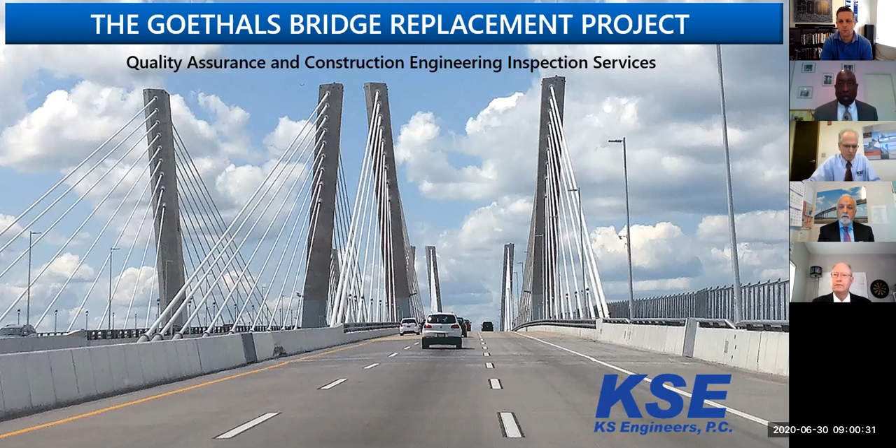to be able to present to you the Goethals Bridge Replacement Project from a quality assurance and construction engineering point of view.

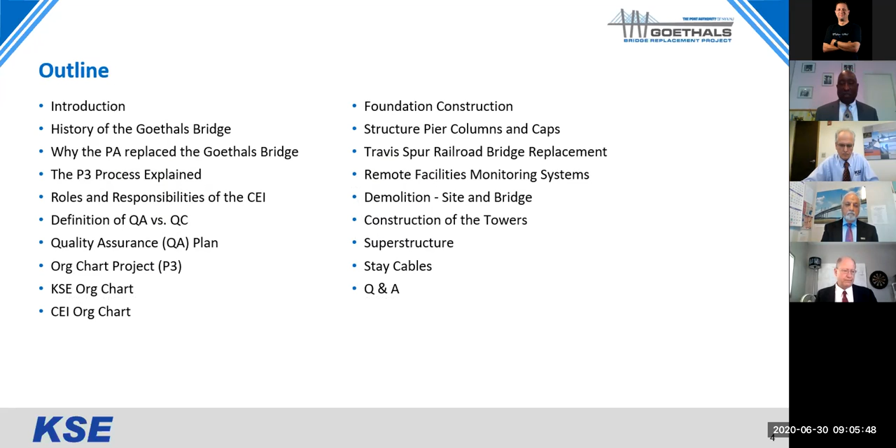Then we go into what we consider the meat of the presentation, the details, the challenges, the things that we had to face in order to make this a successful construction project, including the foundation, the superstructure, demolition and replacement of the Travis Spur Bridge, some of the unique monitoring systems, the towers, and of course the stay cables, which is the unique feature of this once-in-a-lifetime project.

What we're going to be presenting to you is the Goethals Bridge Replacement Project from the quality assurance and construction engineering and inspection point of view. The reason I emphasize that is the Port Authority, Parsons Transportation Group, which was the designer, and KWM, Kiewit, Weeks, Massman, have all made previous presentations on the Goethals Bridge numerous times throughout the lifespan of the project. But our presentation is unique in the fact that we're giving it from our point of view. Then, like I said, we'll go through the P3, the roles, responsibilities, org chart, and importantly, the difference between quality assurance and quality control.

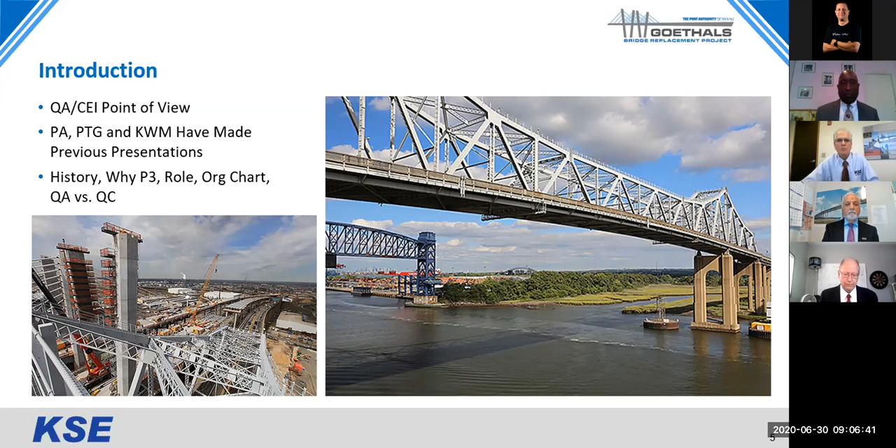For those of you who are not familiar, just to go over a brief history of the Goethals Bridge. The Goethals Bridge spans the Arthur Kill, which links Elizabeth, New Jersey, with Howland Hook over in Staten Island. It was one of the first facilities constructed by the Port Authority of New York and New Jersey, and it was opened on June 29th, 1928, which just so happens to be the same day that the Outerbridge Crossing was opened. The Goethals Bridge was named in memory of Major General George W. Goethals, who was the builder of the Panama Canal, and he's also one of the first consulting engineers for the Port Authority of New York and New Jersey. And the Goethals Bridge is one of 3 Staten Island bridges that link New York and New Jersey.

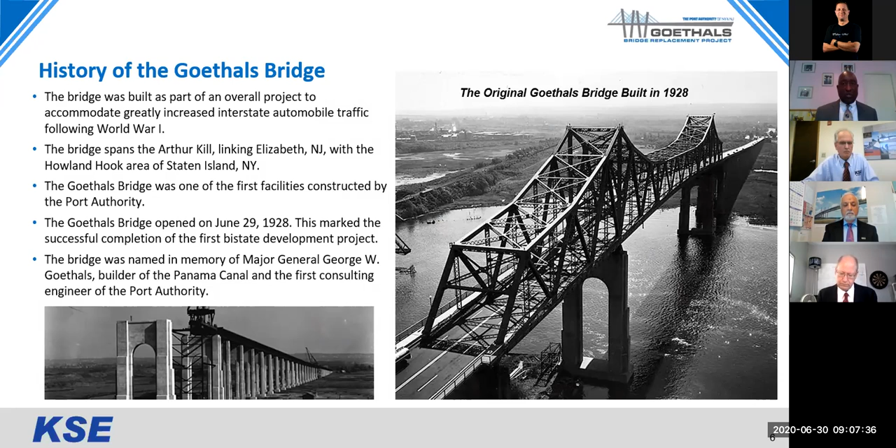So why was the Goethals Bridge replaced? Why did the Port Authority have to spend untold millions or billions of dollars in order to replace the bridge? Number one, as I had said before, the Goethals Bridge was constructed in 1928, and at the time it met all design standards and design criteria. Unfortunately, the bridge has 10-foot wide narrow lanes, which are substandard as compared to the 12-foot wide lanes of today, no shoulders, and only 2 lanes of traffic in each direction, which during peak hours of travel in the mornings and the evening cause severe traffic backups.

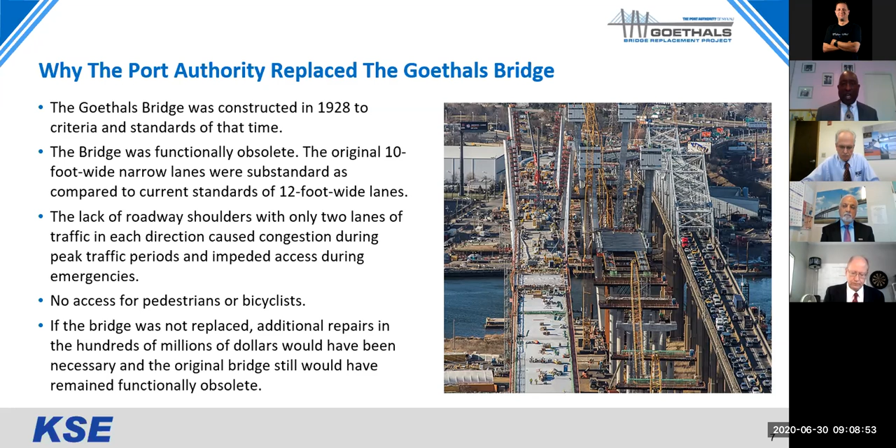And if you ever remember traveling over the Goethals Bridge when there's a large truck next to you, you felt like you were taking your life into your own hands. Also, there was no access for pedestrians or bicycles. And like I'd said previously, the bridge had been deemed functionally obsolete, which means if the bridge was not replaced, the Port Authority could have ended up spending hundreds of millions of dollars on rehabbing the bridge, and it would still have remained functionally obsolete.

Now, some of the constraints that the Port Authority and the design and construction team had to overcome: obviously the bridge has to span the navigational channel, and there was a minimum clearance from the top of the water to the bottom of the bridge of approximately 135 feet. But to the north was Newark Liberty International Airport, so the structure had a maximum height because it did not want to interfere with planes landing at Newark Airport. It also had to be designed in such a way to enable future mass transit.

There was a 4% maximum grade, and the bridge had to be designed to provide a 16.5-foot clearance over the New Jersey Turnpike to the west, and it also had to come down to the east for the New York Toll Plaza. So there were many constraints that the design team had to take into effect when they started designing the bridge.

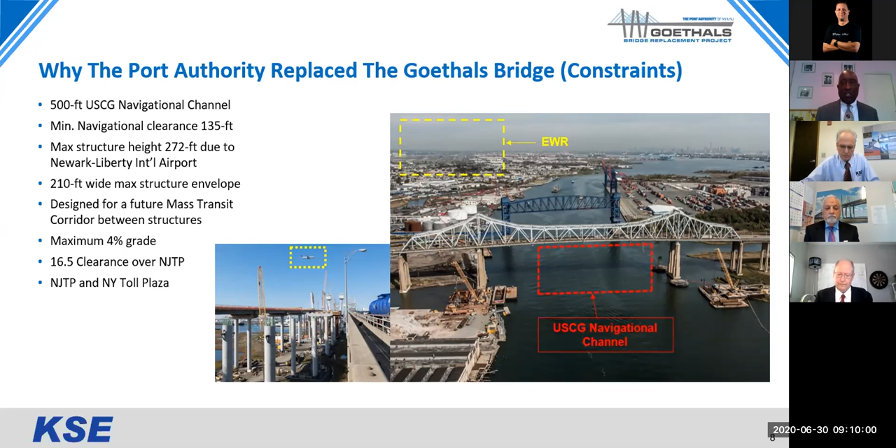The Port Authority, for one of the first times in its history, had chosen to use the public-private partnership in designing, constructing and maintaining the Goethals Bridge. Some of the benefits to the Port Authority were they maintained control of the asset and revenue stream; in other words, they kept the tolls. They had access to private sector expertise and capital. It minimized the strain on their bonding capacity. They had cost predictability over the life of the contract. And what was unique to this project and the Port Authority, the developer maintains the bridge for a 35-year maintenance period. Then they turn the asset back over to the Port Authority.

Now, because of this unique arrangement, and one of the first times it's been done for the Port Authority, it posed unique challenges to the CEI firm. First of all, our contract was held with Link, which was the developer, not with the Port Authority. However, based on the documentation, the RPW, or the requirements and provisions of work, the CEI firm reported to Link, which was the developer, and it reported to the Port Authority. So we had dual lines of reporting, but we got paid by one entity.

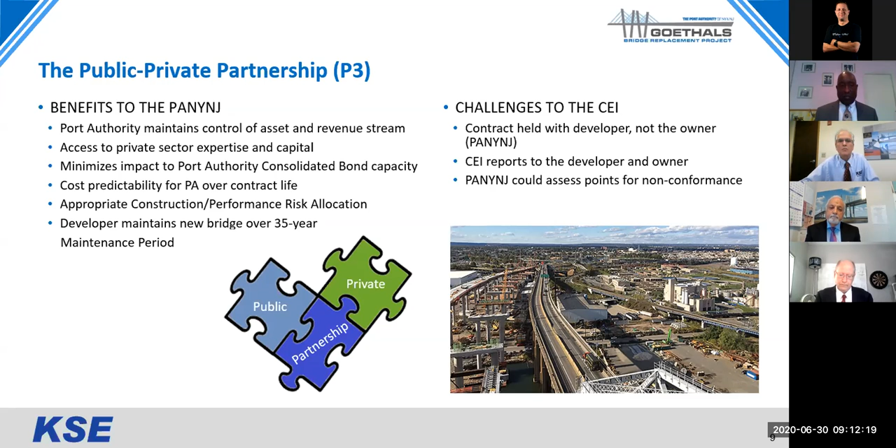Now, as you can imagine, over the 5 years of this project, the CEI had many roles and responsibilities. As you can see them listed here, the obvious ones are we had to ensure that the project was built in accordance with the plans and the specs, but we had a voluminous volume called the RPW, which was everybody's Bible, and that stands for Requirements and Provisions of Work.

We were also responsible for oversight of the lead contractor's quality control plan. We had to make sure that the contractor was doing, documenting, and verifying what the plans and specifications said. We had controlled inspection checklists, which I'll mention a little bit later.

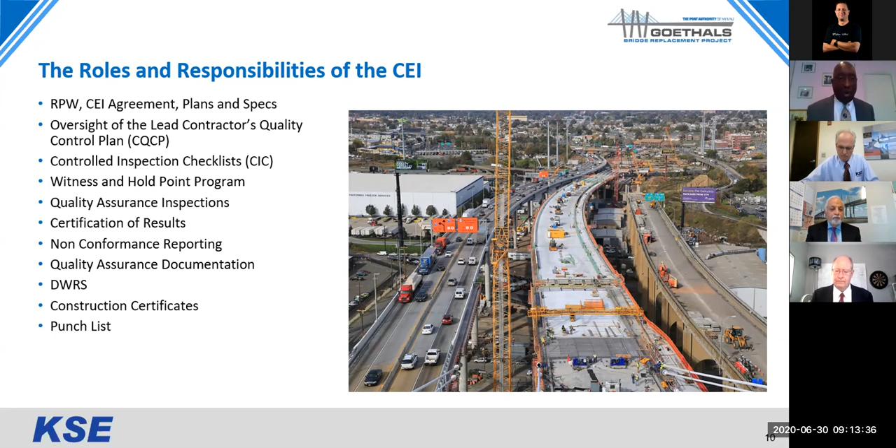We had a witness and hold point program, which in essence meant that the contractor can do certain activities, and some of them had to be checked by the CEI, and some of them they could move on without our oversight. Obviously, there's certification of results, the NCRs, or the non-conformance reporting, quality assurance documentation. It was a very documentation-oriented project. Daily work reports, construction certificates, and punch lists.

So just to be clear, the CEI had not a unique role in the industry, but a unique role for what you would consider resident engineering services, because we had no schedule responsibility and we had limited payment invoice responsibilities and change order responsibilities. So we were truly a quality assurance arm of this project.

And as you can see by this definition, our job was to provide confidence to the Port Authority of New York and New Jersey that the work that was done and the work that was paid for by the developer was done in accordance with the plans and specifications and quality requirements that were on the project.

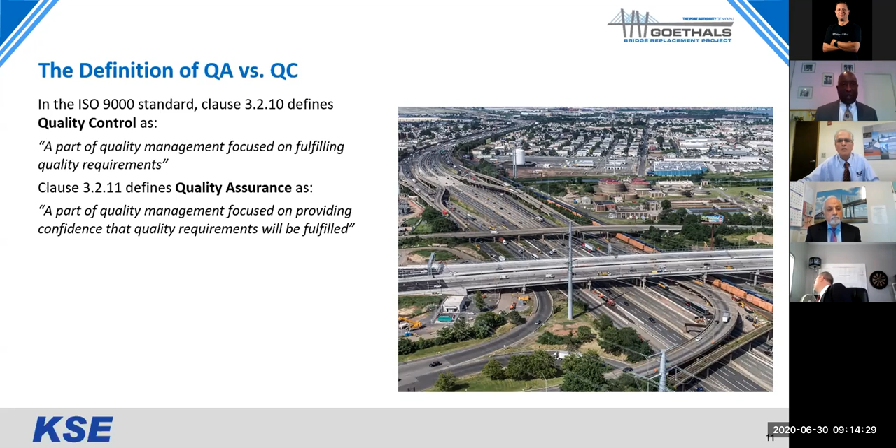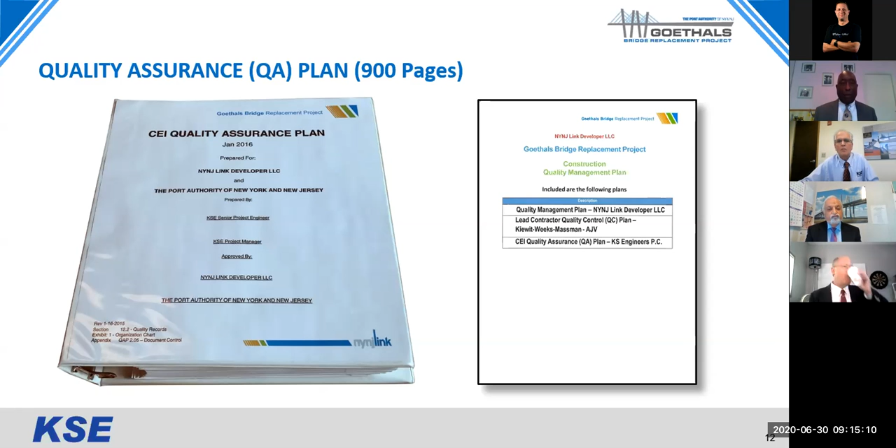Now, contained within this plan, and I know you can't see this because this is very small, were just some of the tasks that we had to perform on the Goethals Bridge project as part of our scope of work. And some of the things that may not be normal on a project were surveys. We were responsible at times for underwater surveys, and we were responsible for spot checking the contractor's survey.

In addition, we had crane responsibilities, and Rasul could possibly go into some detail, but every single crane that came on the project, we had to review the documentation and send it to the Port Authority's crane department, I believe it was, for final approval.

Equipment calibration, something that people don't think of. All material and testing equipment, or equipment that we or our subconsultants used on the project, had to be calibrated, and that calibration record had to be kept up to date. We were audited on that on a monthly basis by the Port Authority.

In addition, like I mentioned before, we had to do non-conforming reports, or reports that would show when things did not comply with the plans and the specs. Going along with that, we had to help the contractor develop recovery plans for frequently occurring NCRs, or non-conforming items.

In addition, there was certification and training. We had to certify that the people that we had on our project had the proper certifications, training, ACI, ASTM, or whatever qualifications were necessary.

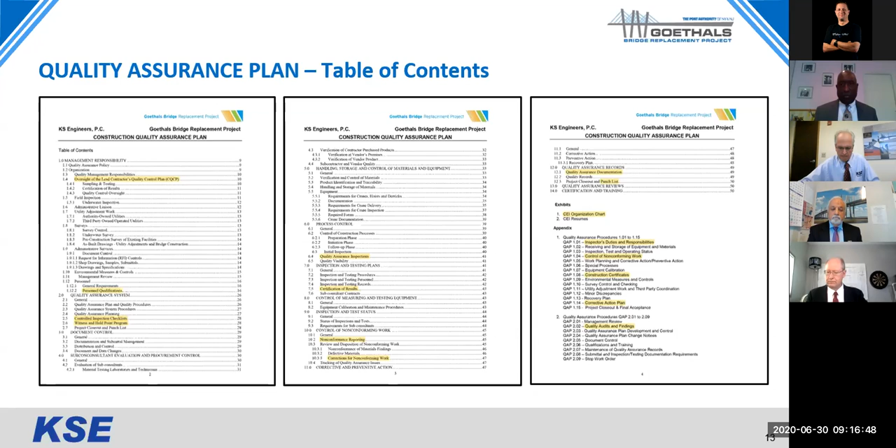Now, the owner's representative for the Port Authority was HNTB, and they had on-site and in-house inspectors throughout the project. They did audits, they did field audits, they did our quality assurance audits. So they really were the eyes and the ears of the Port Authority of New York and New Jersey.

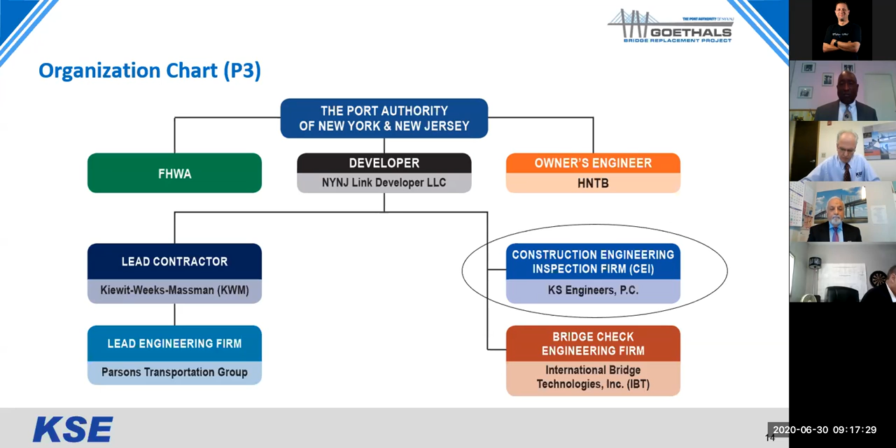With any successful project like the Goethals Bridge, you're only as successful as the staff and the partners that you have on the project. And KS Engineers was fortunate to have some exceptional sub-consultants. We had GPI providing us geotech and structural inspectors. EPM was our environmental arm.

HRV did off-site inspections for us. HVEA, Key Tech, and AEL did materials and on-site inspection. I mentioned our underwater survey that was handled by AIA. New York Geomatics was another one of our survey firms, and KPFF provided our stay cable expertise and our stay cable staffing. They were another key sub-consultant or subcontractor for KSE on this project.

One of the things that KSE is most proud of is the diversity of the staff. We had staff members from all walks of life, including women. As a matter of fact, at one time on the project, our coating inspector, our office engineer, our stay cable inspector, and our electrical inspector were all women. So you can see that we really did have a diverse staff, and it really helped in implementing and ensuring a successful project.

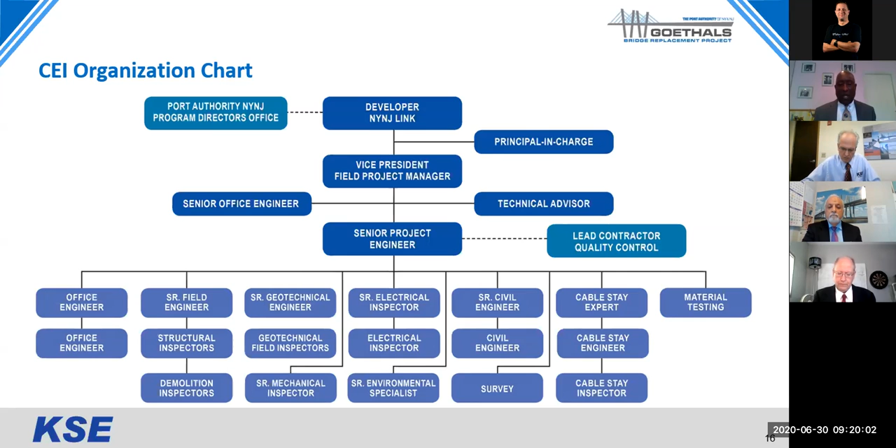Also, some of the things that the staff did, probably normal for most construction projects: in addition to the contractors' daily safety meetings, we had weekly safety meetings with all the staff to talk about pertinent safety items. We also had weekly senior staff meetings that covered other items besides safety. And we had monthly training sessions with all staff to train them on proper use of equipment, how to fill out forms, DWRs, or any of the pertinent topics that we needed to go over for that period.

Just a couple of the details of the project to give you a feel of what you're going to be looking at in the next couple of slides. The replacement bridge had six 12-foot lanes with full shoulders, as opposed to the previous 2 lanes in each direction at 10 feet. It was a state-of-the-art cable stay design.

Obviously, there were updated security and safety features. It provided pedestrian and bicycle access, and also it would accommodate future mass transit between the two structures. There's innovative bridge technology that Rasul is going to discuss in a later slide.